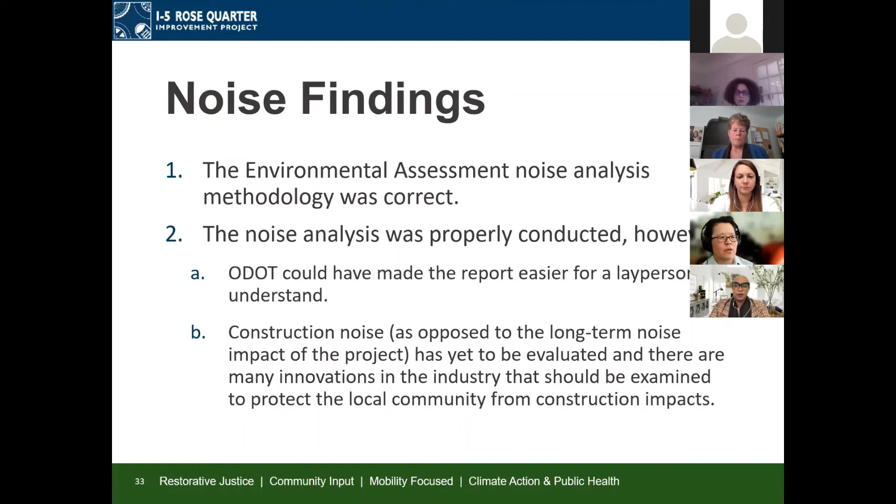To the third point of our peer review findings, we looked at the mitigation proposed for Harriet Tubman Middle School and Lillis-Albina Park and the surrounding neighborhood. The proposed walls do not meet the necessary performance requirements to be feasible and reasonable. They basically looked at how much noise reduction is provided, and it doesn't meet the performance requirements in terms of noise.

We had some suggestions regarding possible options to improve the performance of Wall B, possibly if it could be moved a little closer to the school, maybe it would provide some better noise protection. It also would be helpful for air quality. That was something that the panel discussed.

And then Soundwall 1 did not come up as a viable option, but we were wondering whether ODOT could reconsider their cost guidelines, and maybe Soundwall 1 would show up better in the analysis.

Next slide, please. And then back to construction noise. We provided a lot of suggestions for abating the construction noise, and also some suggestions to the design of the pavement and sound walls. So on this list...

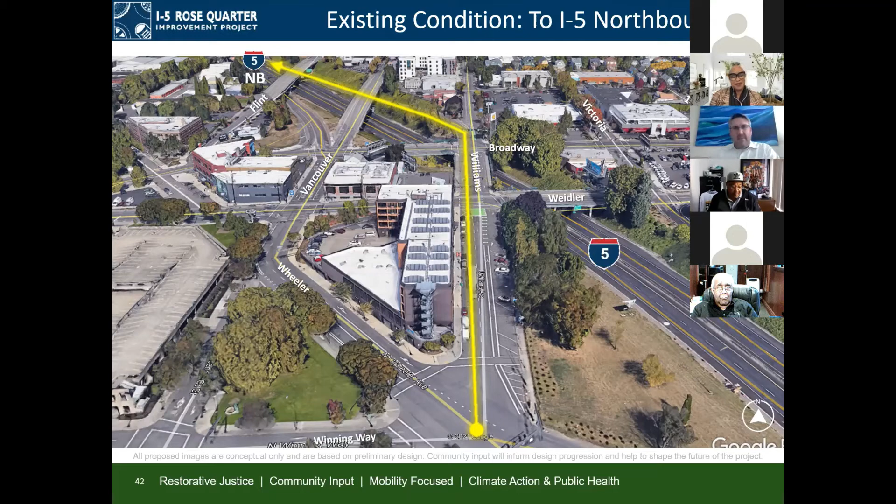So we'll take those same street routes. Click number 1 will be on Broadway. It looks very similar to the existing. The only difference is that you drop underneath the highway cover for a little stretch as it goes underneath Vancouver, where the highway cover acts like a little bit of a tunnel, but still you have this entry corridor that drops you onto I-5.

Then click the next one on Weidler, very similar to what's out there today. Again, the only difference is just that little bit of going underneath the highway cover.

The next route is Vancouver. In this case, Vancouver and Flint are really the same. The Flint connection is being replaced with a Hancock Street extension, and so the traffic that is on Flint would actually get onto Vancouver and create this loop around to get onto I-5 northbound. So this project is pretty similar for the northbound entry.

Very, very similar to what's out there today. The other direction, however, is where the change really occurred. Oh, I'm sorry, I skipped one. If you're coming up Moda Center, then you would come up Wheeler instead of Williams, and then you make a right on Weidler and then get back onto Williams.

As you hit click again, the reason for this is because there are some dedicated bus-only routes that are taking us up onto Williams. This is whether it's buses getting from or coming on from Winning Way or buses coming up the side of the Moda Center. This bus-only route really helps to increase their availability, decrease travel time for buses. So this is the one adjustment that is a strong improvement for transit and trying to make sure that those transit times are more predictable and reliable.

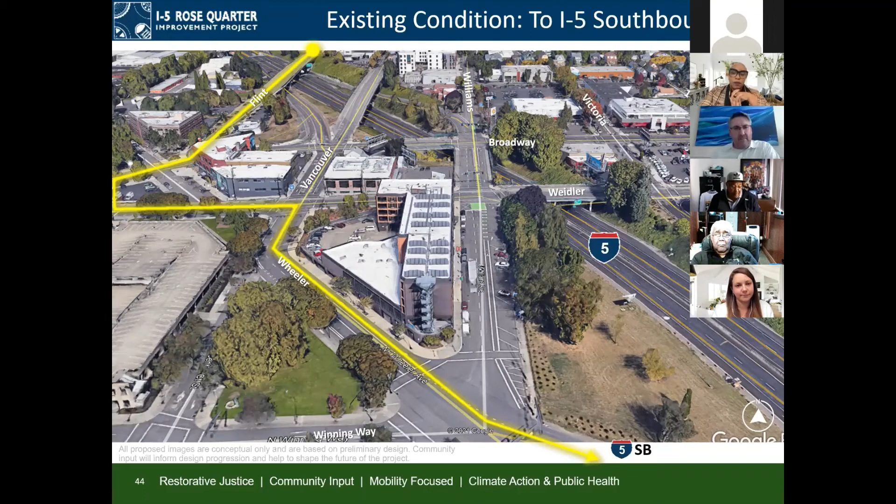And this Williams, as you look at it, really consists of 2 streets. So you saw before how if you're going to head on I-5 northbound, you're on the left section of Williams. In this case, where the yellow line is, you're on the right section of Williams, creating essentially what's going to be called a contraflow. A different graphic is going to show how this movement really happens.

So this is the one direction. If you then are going eastbound on Weidler, you would do the same thing where you extend beyond the Williams street and then go directly onto the on-ramp that drops you directly into the freeway.

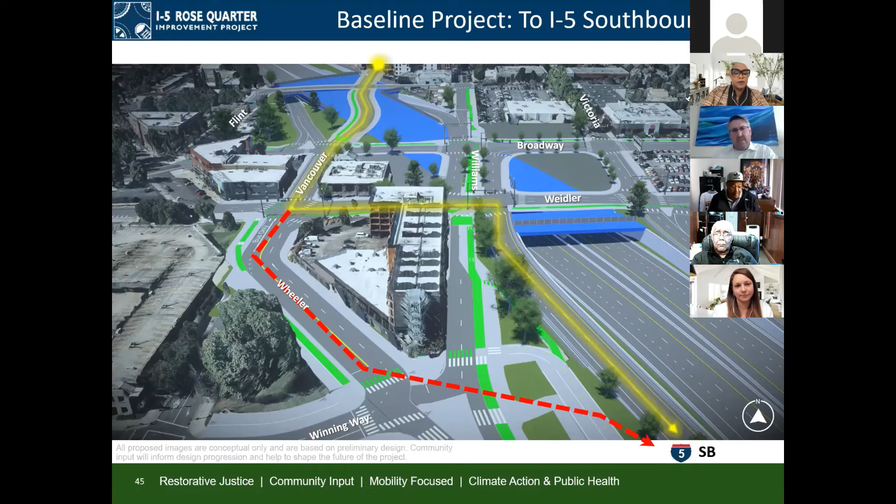The next movement is if you're on Vancouver, this is where you come down across Vancouver, make a left onto Weidler, and then drop directly onto the access ramp onto the freeway itself. So when you put these 2 movements together, you have this contraflow. The Williams Street contraflow is this term that you'll hear over time. So today's introduction of what this really means.

So if you start with where the dots are, that's your starting point. Your arrows at the end are your ending points. And what you notice is those two lines, the yellow and the red, never intersect. And that's really important for this change in operations that's going to be out here.

By avoiding these crossover points, you avoid a lot of mixing between modes, mixing between vehicles, pauses, transit impacts, bicycle and pedestrian conflicts, each of these different things. And so this contraflow really works in a way to separate these different travel patterns to optimize the system.

To help improve the system. And on the next slide, you can really see where these points are. Each of these red blotches indicates some form of significant conflict that exists today that creates partially the delays and partially the congestion that you see.

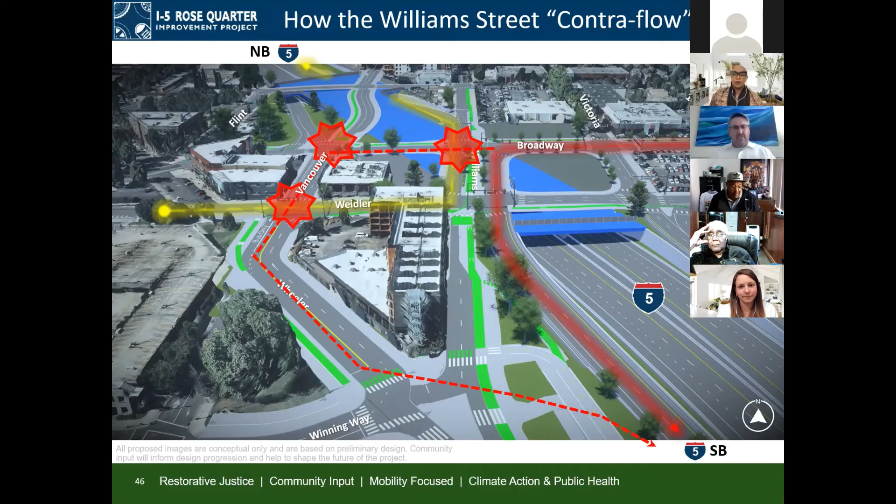And so by removing, if you click on the next slide please, some of the vehicles—whether it's 300 or 400 cars at the street for Vancouver on the left, or 500 or 600 cars that are traversing on Broadway itself through Williams, and this north-south bicycle route that runs right through the middle of it—you can avoid a lot of the conflicts, create a safer space, and frankly improve operations overall.

So this is the hallmark of what is happening with the local streets. And it took 75 different options that were studied, analyzed and looked at to realize that this one is really the best of all worlds, the optimized solution, the balanced trade-off across all the different modes. And this is at the hallmark of our project from the baseline standpoint.

So there's a lot more detail that's going to come over time, but we at least wanted to introduce this discussion and respond to the question that came up at the last meeting about how exactly is the project going to be getting onto I-5. So is this adjustment as it's shown?

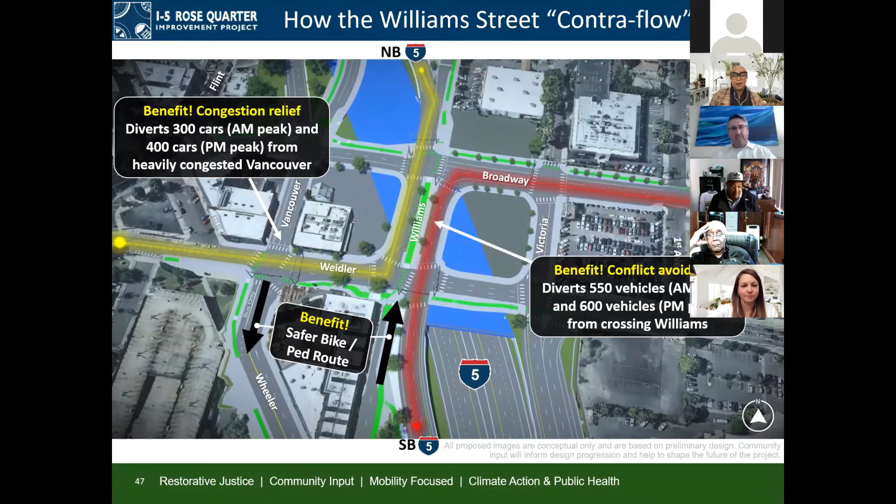So with that, the question is, what kind of space remains for development? And this is what's really, really important. So on that last picture, you saw some graphics of blue. And with this, I'm going to hand it over to James McGrath, again, our urban design lead.

He and Bill Hart worked together hand in glove to come up with the different concepts and really explore the technical feasibility that comes from what you can do to potentially build something on top of these highway cover spaces.

And again, I'll do another plug on behalf of Gina. With this context of what the baseline is, please reach out and go to those highway cover assessment workshops and use this as a starting point to see how other options could morph off of these. Keeping in mind that this might be the NEPA baseline, and this is what the EA has embedded into it, there could be other options that unfold.

So with that, I'm going to hand it over to James to show you some really awesome slides of what could be, even based on this baseline cover idea.

Thank you, Steve, and thank you for having me to all the HAAB members. I'm the Urban Design Task Lead, and what that means to me is I'm responsible for trying to integrate the infrastructure project with the people places, make those two things work together.

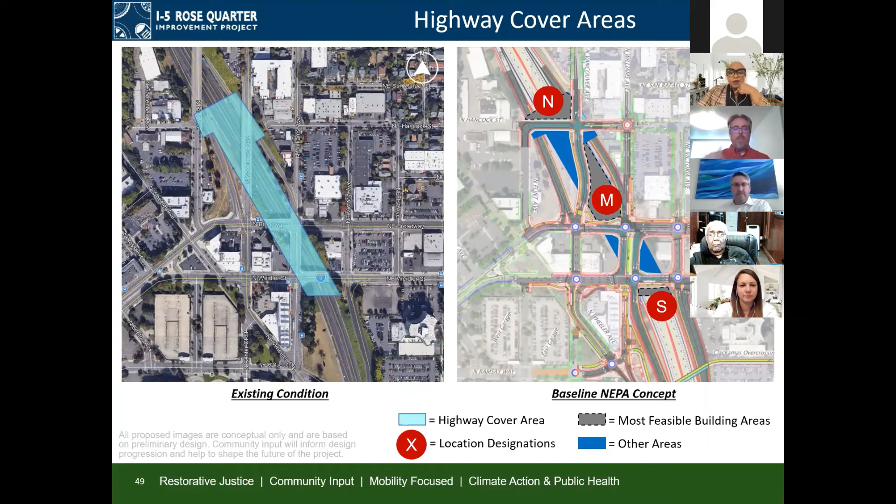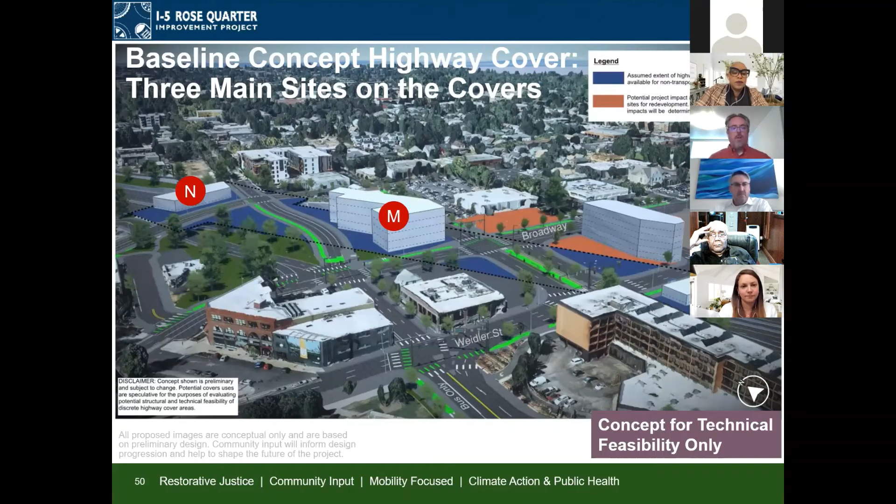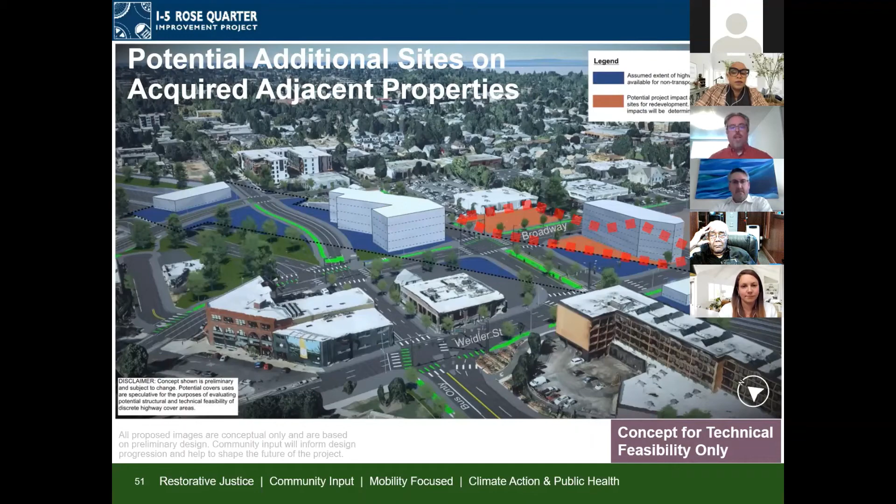So there are sites that we'll talk about that are on covers. Next slide. There are also sites directly adjacent to the cover that I'll also touch on. And again, this is initial exploration, not decisions. We're trying to get some facts on the table and get ourselves prepared for what might come out of the ICA process.

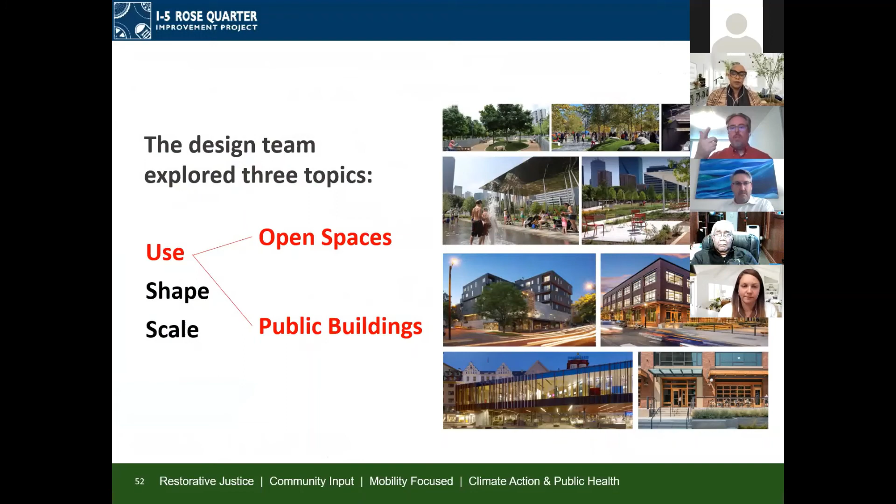Keep going. So we looked at three big questions. What are the potential uses we should get prepared for? And we looked at open spaces, but we also looked at public buildings. Next slide. We also were looking at what was the appropriate shape.

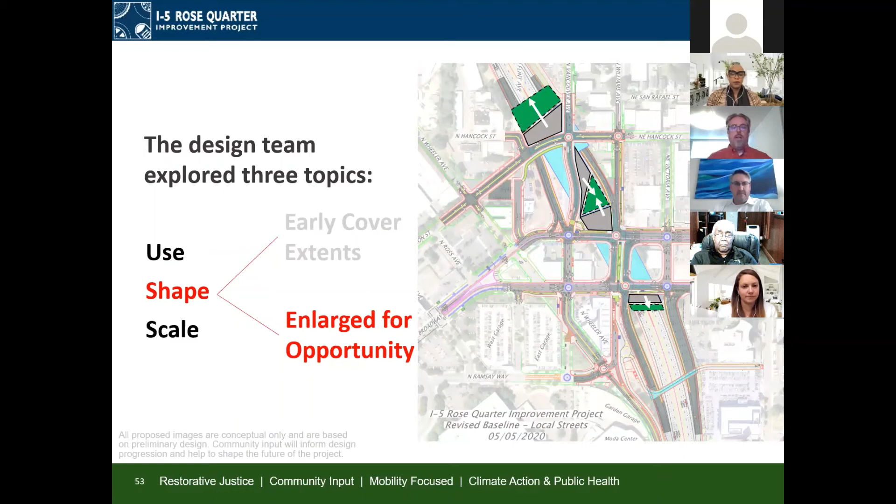When we inherited the design of the project, there were particular shapes for the covers. What we were allowed to do was explore different shapes that might create more opportunity, or provide for more opportunity. So we really didn't look backwards at the previous shapes. We really looked forward, trying to maximize what the cover system could do.

And then the last thing we looked at was what's the scale? What can we hold up? What can we accommodate? Again, not decisions, just an exploration about what can the baseline do, what can we do with the structures and the footprint that we have in our NEPA clearance. So we looked at 1- and 2-story buildings, and we looked at 3- and 5-story buildings as a range to do some technical work. And that's really what this is. Keep going.

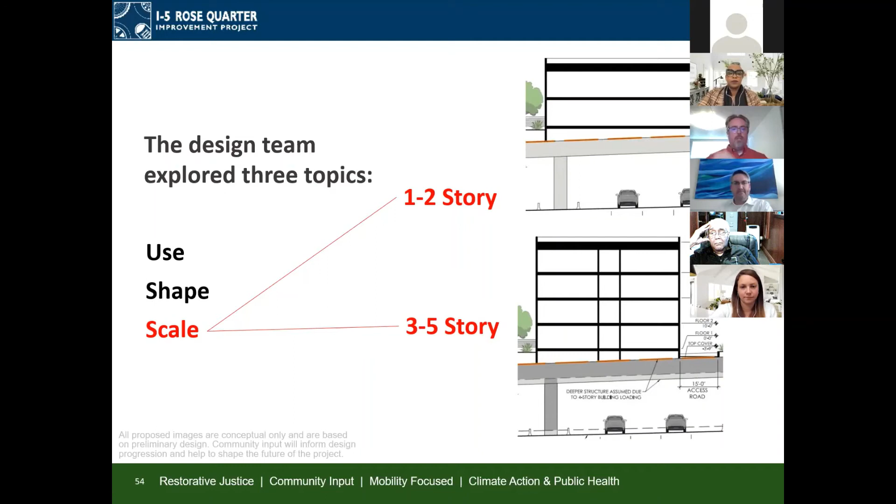So I want to share with you, I'm going to sort of go to the end and come back. We'll definitely talk about some of the design options, but because those design options are really just confections of our designers without the benefit of talking to you, right? We had to do this without the benefit of a lot of public process. I want to talk to you about some of the assumptions we made and some of the high-level takeaways.

So the first thing that we noticed is that the cover is big, but the developable areas, specific to buildings, are smaller than the extent of the covers. First of all, the covers have to do work for the local streets, they have to hold up those local streets. But there's also some structural rules and logics that we assumed, we didn't decide for the project, but we assumed...

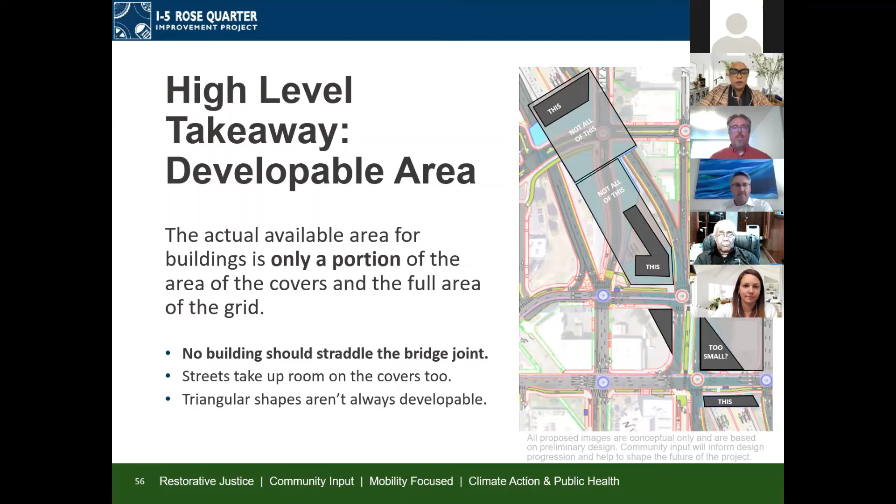That no building should both be on a bridge and also on land adjacent to the bridge. In other words, no building, no development should span the gap. And there's lots of reasons, and we can dive into those reasons. But what this means is that this is the origin of there being 3 main sites that we wanted to look at, and then there's some other fragments of space that we think have promise for other and complementary uses. Next slide.

Some other rules that we thought prudent: local roads take up space on the covers and you have to avoid the joints, but there are also concerns around access, maintenance, fire and life safety. These concerns told us we should set back from the edges, allow for travel ways, maintenance ways, and inspection site access, which further constrained the area for vertical development. It's easier to accommodate those offsets and maintenance walkways in a landscape or open space situation, but you'll see their consequence rendered when we get into buildings.

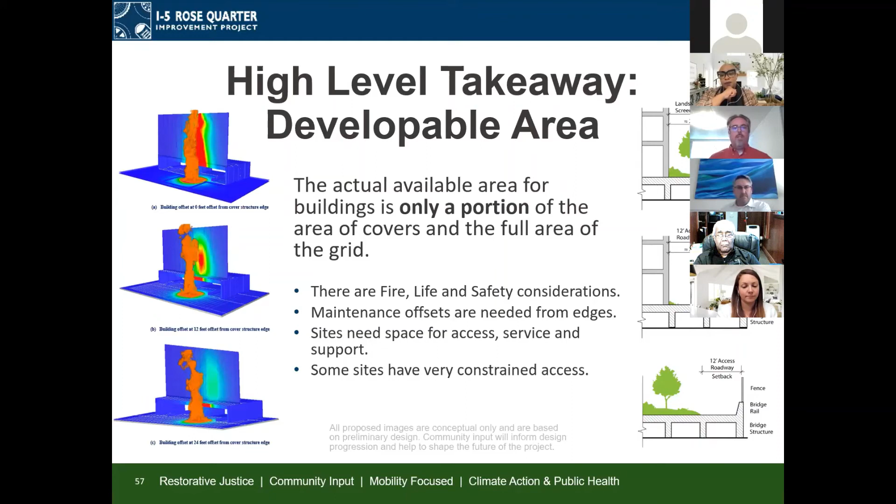The other really important thing is that what's happening down below really does matter to what can happen up above. We have a number of northbound lanes that need a clear span, and a number of southbound lanes, so we essentially have these two barrels underneath us. But as we migrate to the north end of the project, because of the ramp geometry, the bridges have to change—they're longer bridges, they have to span further. So there's some structural complexity underneath, and it really does have a relationship to what can happen up above.

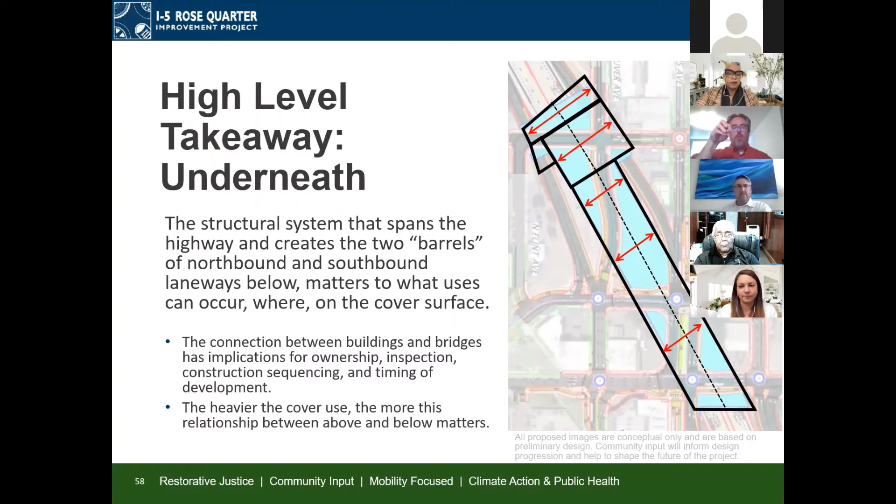There are some rules that emerge, or assumptions that we made, about how these two things relate. Even though you don't see it, it actually has consequences for where you might put a building foundation or a building edge. In short, the heavier the objects on the cover, the deeper the structure needed to hold it up. That's fairly common sense—the bigger the stuff, the bigger the bridge.

What we found out is that we can push the highway down a bit, about a foot, to accommodate some of that increase. If the bridge has to get wider, the bridge that holds up the cover has to get thicker—we can push the roadway down about a foot. But if that won't do it and we need more structure to hold up big things, what winds up happening is the whole surface kind of has to lift up. We still need that hole in the sky for the freeway, and then we need a thicker bridge.

So what it means is that the surface of the covers have to lift up, and that can be problematic when we're trying to stitch these streets and places back into the existing condition. So it's a balance point, and we were trying to find that balance point. I'm not saying we found it perfectly—there are many creative solutions that can occur, but it's important for you to understand that relationship.

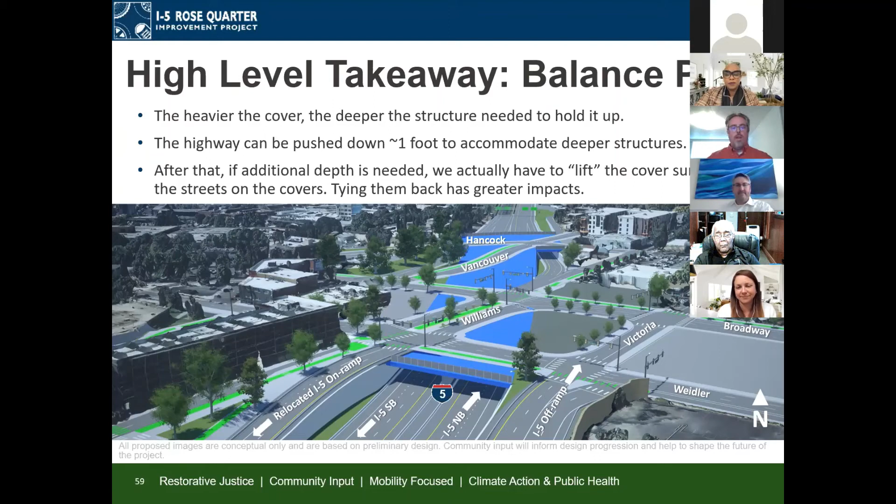The other thing is, for buildings in particular, buildings need utilities. They need wet utilities, they need technological utilities, and sometimes they need vertical circulation systems. If it's a multi-story building, it's going to need an elevator. And so we wanted to be honest with ourselves and explore what it takes to serve a building on structure.

It's complicated, not just because each of these buildings is going to need essentially a crawl space between the top of the bridge and the ground floor. That will change the relationship, or has the potential to change the relationship, of the building to the sidewalk adjacent. And we care about these things in Portland—there are rules around how buildings have to behave next to the street.

But this is somewhat uncharted territory for us, how all of these systems will get into and out of the building. So it's important to recognize that we're going to have to stuff some things in, and not all of those things can be below the bridge deck and between the bridge deck and the highway below. So we're thinking there's some sort of utility space that will change the relationship of the building to its context.

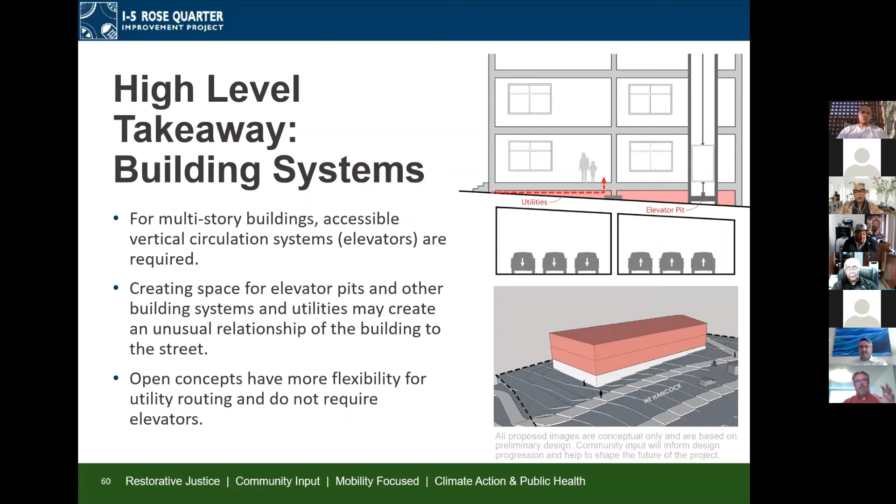Now, the other thing to mention is that I had pointed to three main sites, but there are also complementary sites—sites that might be impacted by the project or acquired by the project that are off cover. We explored what the possibilities of those sites are. Those sites are generally governed by the existing zoning because they are currently private property, governed by height, bulk, and all sorts of types of uses. But in a lot of cases they're directly adjacent, and we believe there's a really fruitful relationship that can occur between a development that's off structure—a more commonplace structural solution, a building solution—that we could blur the boundary between that and the on-covers things.

This happens to be right in the middle of the project where there's a potential development site that is off structure, but perhaps the parking lot or the plaza environment that serves that building and complements it can happen on the covers. So it's important to note that the covers provide opportunity to stitch these places together in ways that aren't exclusively about building buildings.

But before we do, I wanted to share images of the work we did, exploring trade-offs and consequences. First, without having talked deeply to the community or to you yet, we created a proposition: what if the covers were used for public realm, open spaces, parks, or play spaces? This is just an idea so we could explore technical issues—could we plant trees, where could we plant trees, could we have a water feature, what would it take to get a level playing field?

The truth is, the covers provide a really strong platform for lots of open space and landscape solutions. We looked at cover extents that were shorter and tighter, and ones that were expanded. We have lots of flexibility with open space. Even if we were to put buildings on these, the space around them is still going to be on the covers and will need to accommodate landscape. So the ideas and lessons learned here will apply to whatever the future solution is.

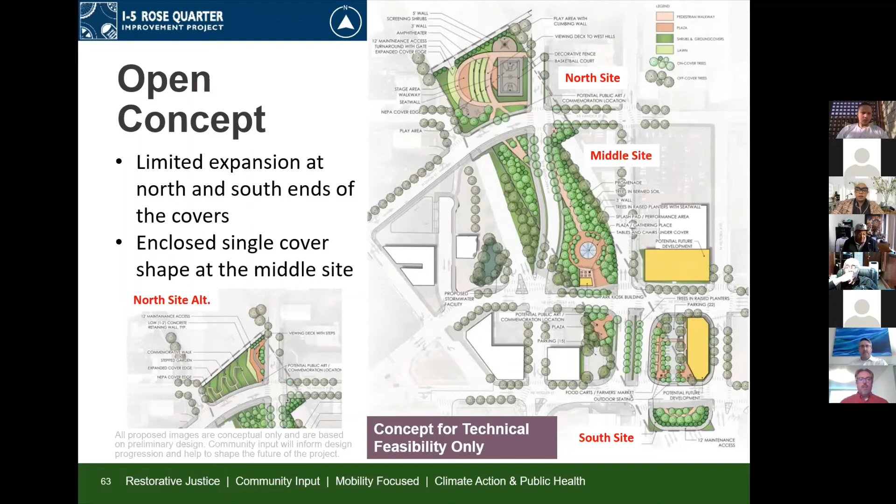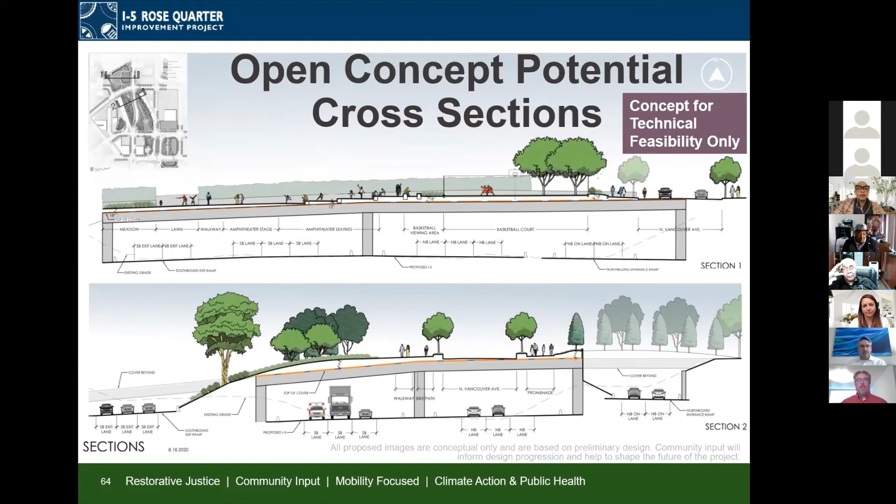Even if you piled dirt on the covers to get the right soil volume to plant trees, which we'll have to do, this is a relatively thin crust. That means open space solutions are easy to stitch back into the adjacent streets and communities, and there's not a structural premium to do so. We can fit open space solutions and creative ideas clearly and easily within the baseline. That's really the point—the more complex options come when we start talking about buildings.

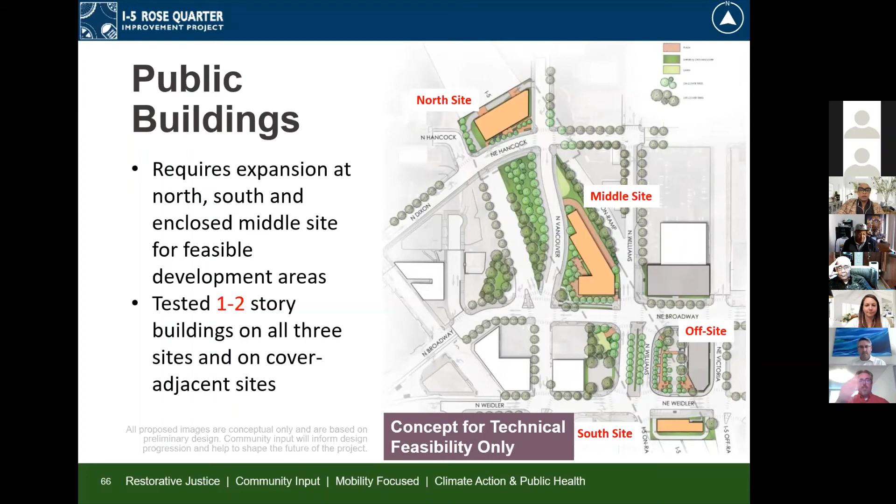So keep going—the next slide will go from north to south. This is a depiction of how landscape and buildings might work together. You can see there's a building north of Hancock, and you'll note the project's geometry changes—Hancock is in flux, so the site north of Hancock is also in flux. But the premier site we imagined was the middle site because it was the largest. There's also a relatively small site at the south we'll get into, but let's dive into that north site.

I don't want to talk about assumptions of what's in the building—we were looking at what's the right footprint, a reasonable footprint. This is where Bill Hart and his team really shine; they do architecture in Portland of all sorts all the time. They helped us scheme these buildings as well as the access required. Here's an example where we've left a drive aisle between the edge of the cover—we've set the building back, making that space do double duty as landscape buffer and drive aisle, while pushing the building edge away from the edge of the structure.

Because of the length of spans up here on the north cover, we think a one-story building is feasible—lots more design has to be done. A two-story building on the north cover is also feasible, but we'll need to get into way more detail. In the baseline context, anything taller than two stories doesn't really make sense or isn't accommodatable. Three stories is unlikely on the north cover.

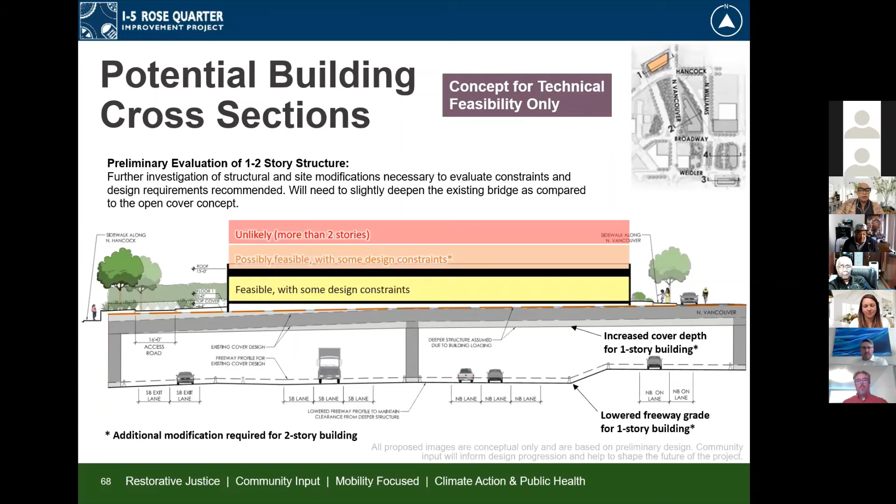Let's jump to the middle site. There we looked at a range of uses—this is really the signature site. It's both the largest site at scale, but it also has what I'd call a civic address. It's on Broadway, but also visible from Vancouver and Williams, so it's right in the heart of the area. It could be residential, it could be commercial—this site has a lot of flexibility.

Next slide will show you that this is also the place where we think 2 stories is accommodatable, again, within the baseline. A 3rd story is possible, if not likely. And then when we get into the stories above that, 4 and 5, it's really a stretch to fit that into the existing project, into the existing baseline.

Remember, the taller it gets, the deeper the structure gets. We can only push the surface of the highway below down a certain amount. So anything that gets bigger, we have to lift up that street, and then we got to sweeten it back and tie it back into the adjacent streets. So it's getting challenging when we're in that 4 to 5 zone, or 4 to 5 stories in the middle zone.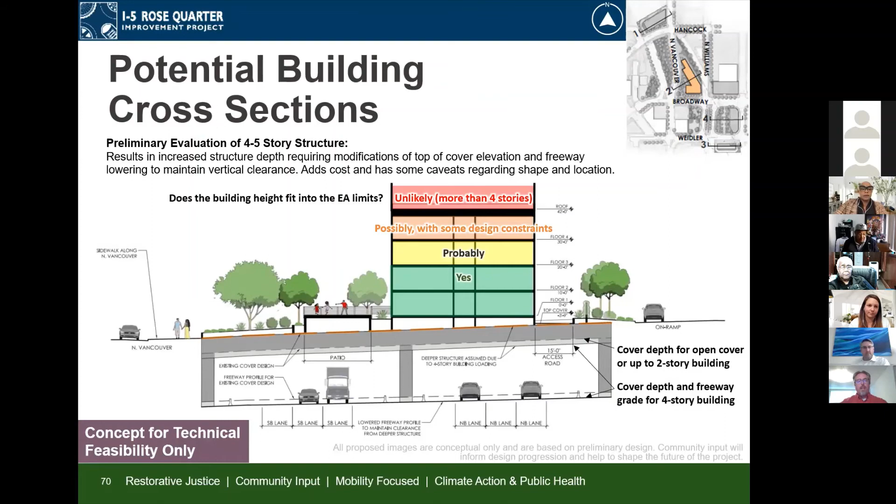Next slide. South site presents some unique and perhaps different constraints. It may be hard to see in this graphic, but the south site is sort of landlocked. It's between 2 ramps, so you can't turn off a ramp and get into a driveway. So its only frontage and access is on Weidler itself, and that constrains it.

Either we have to circulate around the building, and we're thinking for things like trash and recycling and other kinds of building services, or those things are foisted out onto the street. But that street is doing a lot of work. There's pedestrians, there's a cycle facility, there's a bus stop, and then there's the through lanes. So this one is constrained by the geometry of the ramps and the geometry of the street. And that is really the limiting factor.

The structural system that underpins this site is the same as the middle site, meaning you could go a little bit bigger. But what constrains this, and what in our estimation constrained the opportunity, was it's sort of hemmed in. So this is a relatively small building. Next slide. You could do a multi-story building here, 1 story or 2 stories. But in fact, it's the site geometry that limits it. But there again, those assumptions and those things can be challenged.

So I think that's my last slide. Can we advance the slide, or am I 1 slide behind? I'm not sure. Are we having some technical difficulties there, Natalie? Unable to advance the slides?

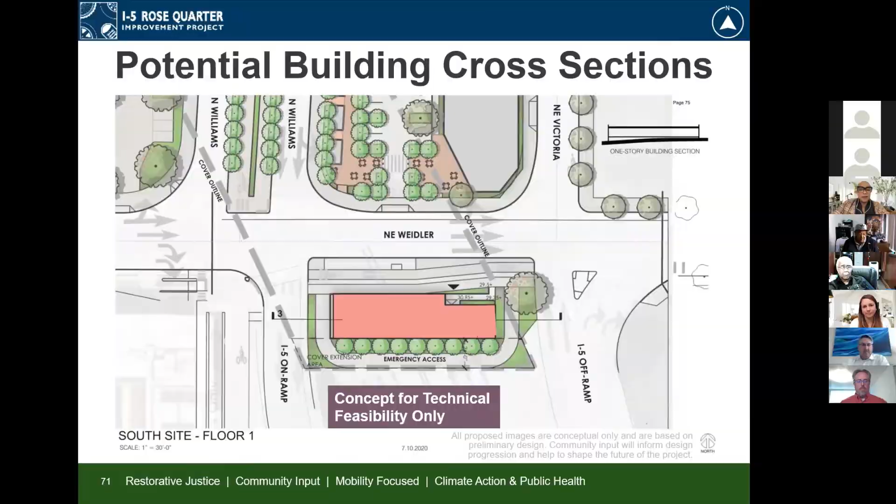Perfect. While we have a few moments, I want to give an opportunity. Thanks, Steve and James. I want to give an opportunity for HAAB members to ask questions from the A&E team. Is there anyone who has specific questions? Again, we're always open to forwarding your comments and hopefully being responsive to those things you have questions about, but wanted to take a moment to give an opportunity if you all have anything pressing at this moment.

I am really excited about seeing what you guys brought back. For the first time, I sort of got my hands around what this real project looks like, and I do appreciate that from y'all. I mean, y'all did a really good job of laying that out to where it doesn't seem like it hit this or impeded that. You showed me a few things that were really exciting, and so I want to thank you for that, because you clearly defined those tops and the capacities and all those things. So now I feel really informed about what this project really looks like, potentially could look like.

So there was just one of the things that I might have had a little bit of an objection about, but the fact that these covers can carry buildings and structures and those types of things, I think that's the target for where we're trying to get to, at least in my book. And the other part was the reason why I did not support the park part of this, so that you get this real clear, y'all, so that I don't mix my messages. To me, the park concept in this reality here just seems to add to the gentrification. Okay, if you know, where I went to school at, which was an Ivy League school, urban studies, community development simply means Black people removal. Okay, and it's real clear to me that when you continue the projects that you already got going on Williams and Vancouver, if you played into that park concept, all you would have done is add convenience to that sense of direction in which we're going, and that is a gentrified direction.

We are well past. Oh, well past this. Yes, ma'am.

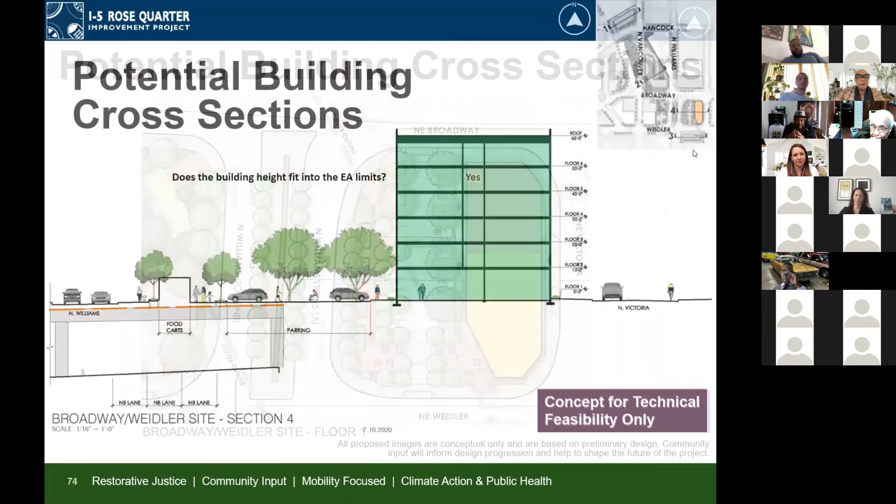Perfect, here we are. This has been a long evening. We've had some great conversation, and I want to give members of the community, as well as the Historic Albina Advisory Board, a brief synopsis of where we're moving forward.

Please continue to keep in mind the independent cover assessment work. Those online open houses will be beginning in the next week, and we need your help making sure that members of the Historic Albina community, those Black and Brown Portland folks, have an opportunity to let their voices be heard regarding their vision for what could happen in this process.

We will be working with Jessica and her team to finalize the project branding. And we will take a look again with Steve Drahota, James and his team. They'll be bringing you some more information regarding the local streets. We'll have updates on early work packages and a presentation on what performance measures would look like regarding the outcomes of the project values. So we want to update you.

Our next meeting together, next slide, Miss Natalie. Yeah, those are great dates.

So again, I'll reiterate, the independent cover assessment workshop is going to be April 15th and 17th. And the online open house, we will need your help putting the word out into the community. Our next meeting together will be on April 20th. That's a slight change, it should be in your calendar invitation. In that meeting, you'll be having a mini workshop from the independent cover assessment team, taking you through the same thing our community stakeholders will be experiencing.